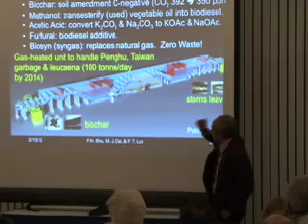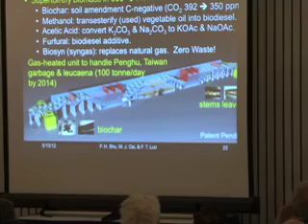So let me just show this thing, it's very simple. We have here not molten fluoride salts, but molten acetate salts, which we keep at 300 degrees. We've done laboratory experiments and we know if you take any biomass and keep it there for 10 minutes or longer, it will char. It's like bad cooking, okay? It just burns, except you do it without air. It's below the salt level, so there's no air. It doesn't actually burn, so it all turns into char.

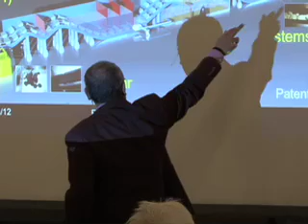So if you take stems or leaves, it becomes charcoal. On one side you come in, and the way to keep the air out is just to do underwater swimming, because we also need to wash the salt off. So you load the biomass onto here. Out here you have air. We remove the top and the front so you can see it. You let it swim under a partition. Now there's no more air.

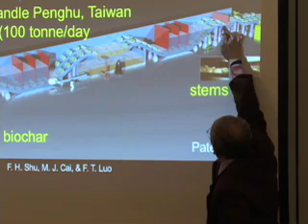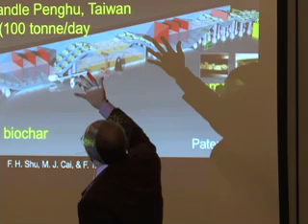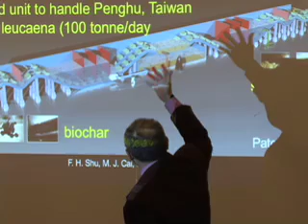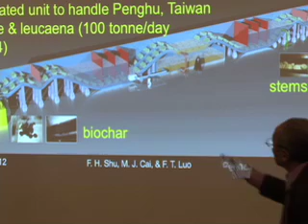It's only got whatever biomass puts out, which is water vapor and other things like methanol, which we can use to transesterify vegetable oil into biodiesel. We have acetic acid, which can be turned into acetone, or we convert potassium and sodium salts into the salts we need to run this reactor. It has furfural, which is a biodiesel additive, and you also drive off volatile organic compounds, that's syngas, which replaces natural gas. There's zero waste in this process.

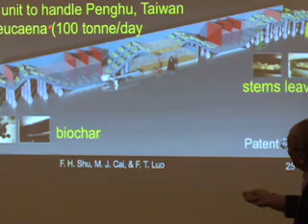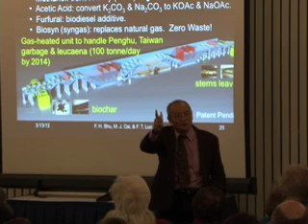We're building a unit like this, hope to complete it within two years, and be taking care of the garbage and this highly invasive tree that was introduced to the island, which the government now wants to get rid of. We'll process 100 tons a day. This is exactly the amount that Palo Alto wants to solve the problem. We've talked to the city of Palo Alto.

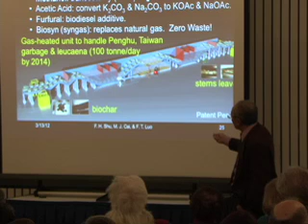The scale of this thing is given by two figures. I think you know Darth Vader, he's about 2 meters tall, so you can tell how tall this is. This is not 10 acres, this is a tenth of an acre compared to biodigestion. And then this is R2-D2. Of course, in these kinds of situations, the big guy gets to be supervisor, the little guy does all the work. Since he does all the work, I suspect R2-D2 is a woman.

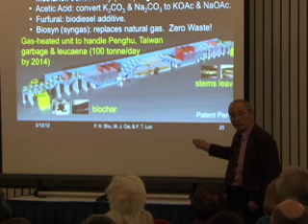That's how we want to do it. So you use this stuff, which is easy to use. You can either use this, you can burn it if you want. We suggest it should just be buried to improve the soil. You can burn this stuff, you can burn this stuff.

No, but it was taken out of the air the previous year by biomass, so it's carbon neutral. When you bury the coal, it becomes carbon negative. If you ever want to go to carbon zero, you have to have something that's negative, and the reason is because everything else we might electrify, you cannot electrify an airplane. I wouldn't want to fly in an airplane that ran on batteries, and I don't think anybody would. So you always have to make that piece, and that's not a trivial amount. This is carbon neutral, and if you bury the charcoal, it becomes carbon negative.

And in a safe way. Coal does not rot, right? If you have a bag of charcoal in your garage, you don't have to worry about it going bad. You can leave it next season, you can leave it for 1,000 years, it does not rot. But biomass, if you just let it stay on the ground, it will rot. It will give you not only carbon dioxide, it will give you methane. That's what Palo Alto went through with all this argument - you put it in a landfill to make compost, but it's actually worse than if you had burned it.

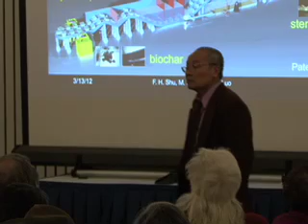Is this a fast reactor? No, this is a thermal reactor. Oh, it's going to be a thermal reactor. Yes, okay, otherwise we don't have enough plutonium. Okay, I can show you a slide. The U.S. has enough plutonium and spent fuel such that we can do this conversion and supply all the energy needs before the middle of the century.

And a bad safety aspect with the byproducts. If you have the blanket, the salt will become radioactive because it sees neutrons. But if you transfer it to another salt, you can use that salt to heat water or gas and generate electricity the conventional way.

Curious about the scale, the economy of scale. In other words, how big would this be? Let's say municipal garbage for the Bay Area. Did you need that in order to generate what you need to make your money? Okay, what size are we talking about?

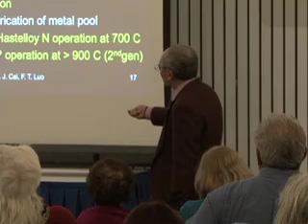Okay, so most people don't realize that a nuclear reactor can be run at any level you like. The upper limit is set by whether you can remove the heat. Okay, so here is a graphite heat exchanger. It's about 1 foot cubed, and it can transfer—if we had nuclear power, it's too small to run a chain reaction, but if we did, it can transfer 140 megawatts of heat, which is enough to power all the energy needs of 30 homes.

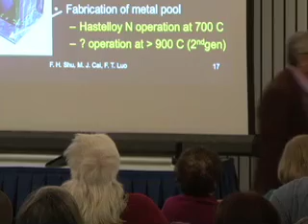140 kilowatts, excuse me, okay? If you scale it up, you just go wider. So to power something like the Bay Area, you would need maybe 4 meters. So in South San Francisco, there's a garbage plant, and they process garbage. You could put one there, process the garbage, and generate electricity.

Yeah, so for Palo Alto, this thing is about a 1.4 megawatt thing. And the average nuclear power plant is? Oh, gigawatts. Yeah, we don't want to build them that big. The problem is that people build these huge things, which then it's very hard to take care of. So we're talking about a lot of small area, like 100 megawatts. That's sort of the ideal size.

Question on this side? Yeah. I have two brief questions. First, can you compare and contrast the molten salt reactor to another advanced reactor type, like the lead fast breeder reactor? And also, if you could speak a little bit to the removal of the fission products and the poisons—I think you mentioned xenon 135. As that builds up, it has an effect on your efficiency.

Xenon 135 is very easy to remove in this reactor because it's a gas, so it will bubble out of the pump bowl, okay? The thing that you don't want is for it to go into the reactor before it gets to the pump bowl. That's why you want to seal the reactor. The lead fast reactor or the bismuth fast reactor is very similar to the sodium fast reactor.